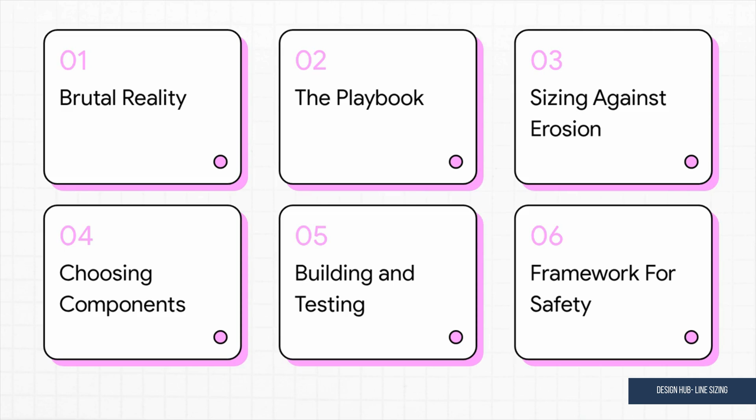So, here's the game plan. First, we're going to paint a picture of just how brutal the offshore world is. Then, we'll introduce the playbook itself. After that, we'll dive into 3 key principles: how you size pipes to fight erosion, how you pick the right parts, and how you test everything to make sure it's absolutely safe. And finally, we'll pull back and look at the big picture.

All right, so first things first, we need to set the scene. Why is a standard like this so incredibly necessary? Well, it's because an offshore platform has to survive in one of the most hostile environments you could possibly imagine. We're talking about insane pressures, sometimes up to 10,000 pounds per square inch. You've got this huge swing in temperatures, but the real relentless enemy is the chemical attack.

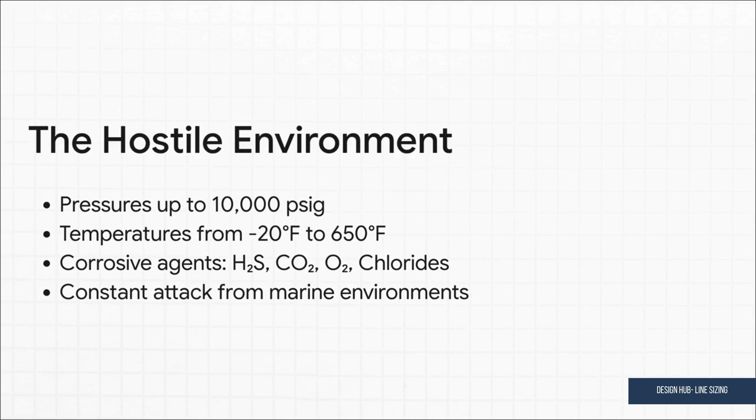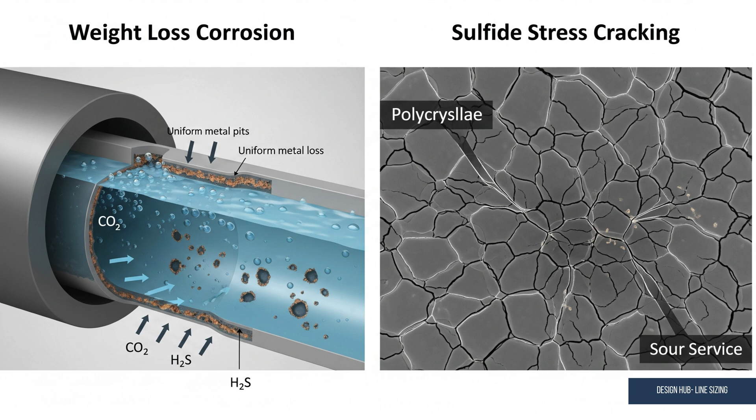You've got saltwater, corrosive gases like hydrogen sulfide, CO2, and chlorides just trying to eat away at the steel 24/7. In a world like this, the consequence of failure is enormous. There is zero room for error. Okay, so how in the world does the industry fight back against all those forces? Well, they use a playbook.

So let's meet our guide, API RP 14E. Now, this is not some textbook theory cooked up in a lab. The document itself calls it a collection of proven sound engineering and operating practices. You have to understand, every single recommendation in here is basically written with the ink of experience, often tough experience. It's all designed to make sure that what gets built out there is both safe and reliable.

Okay, so let's get into the nitty-gritty. One of the biggest battles an engineer has to fight isn't from the salty air on the outside, but from the fluid rushing through the inside of the pipe. And that brings us to this concept of erosional velocity. Basically, if the mix of oil, gas, and water flows too fast, it acts like liquid sandpaper. It literally scours away the pipe wall from the inside out, which is, as you can imagine, incredibly dangerous.

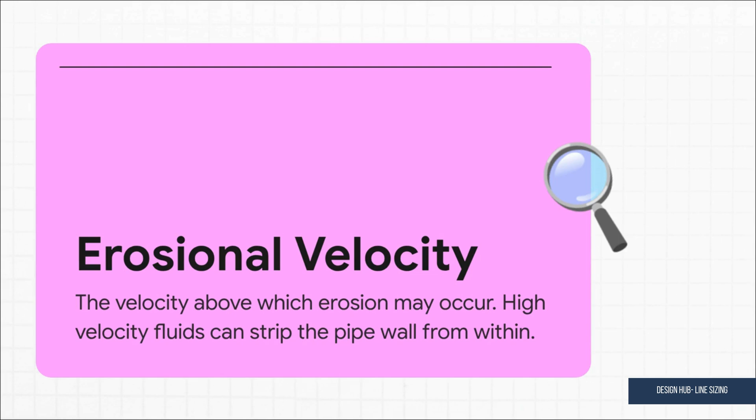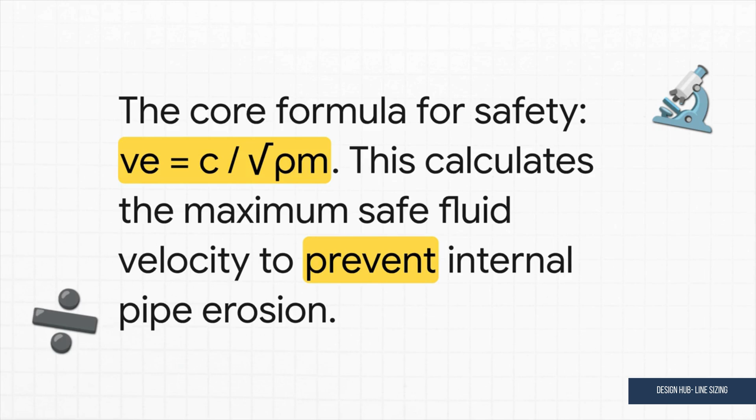So the big question is, how do you know what too fast actually is? Well, you calculate it. This surprisingly simple formula is right at the heart of the standard. It lets engineers figure out Ve, that's the maximum safe velocity, based on the density of the fluid, rho m, and this really interesting constant, C.

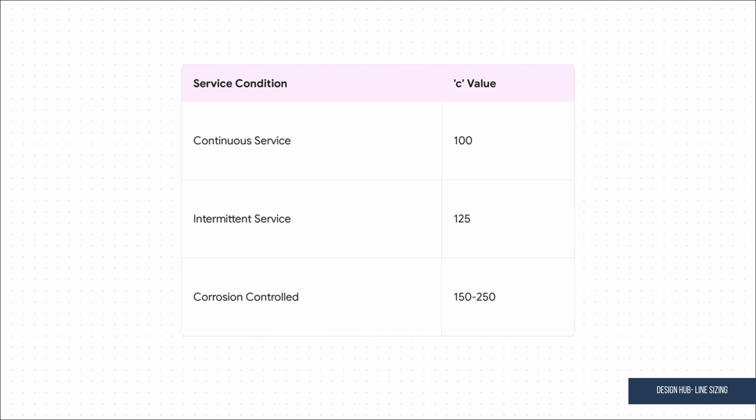And this right here is where you see the real-world genius of the standard. That C value, it's not some fixed law of physics. It's a number based on experience and judgment. You can see it changes depending on the situation. For a clean fluid that's always flowing, you use a conservative value of 100. If the flow is intermittent, or if you have really good corrosion control, you can use a higher number. It's the perfect blend of hard physics and field-tested wisdom.

All right, so you've sized your pipes correctly. What's next? Well, you've got to put stuff in those pipes. And just like with velocity, making the right choice is absolutely everything. Because out here, a valve is never just a valve. Every single component, from a tiny little fitting to a massive valve, is a carefully engineered decision. You have to think about what it's doing, the pressure it's under, the temperatures it has to handle, and what kind of fluid is passing through it. One single wrong choice can put the whole system at risk.

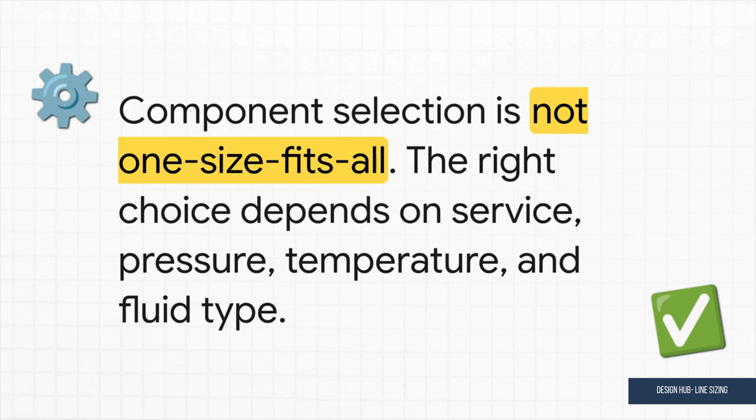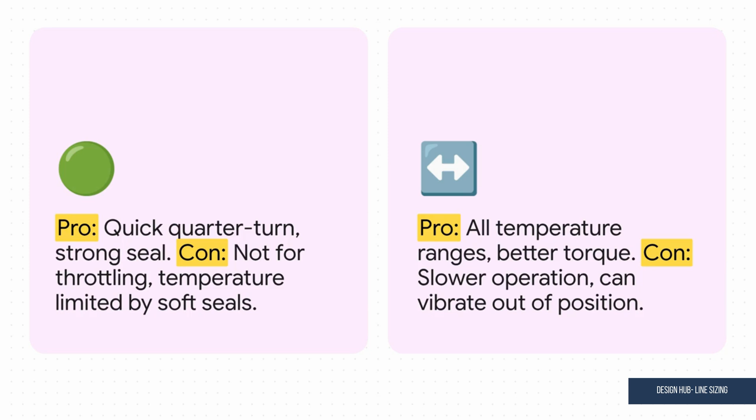So let's put 2 common valves head to head to see what I mean. Need a quick, tight shutoff? The ball valve is your friend. But those soft seals mean it can't handle extreme temperatures, and you really can't use it to just partially throttle the flow. For a high-temp, heavy-duty job, you might pick a gate valve. But the trade-off? It's much slower to operate, and it can sometimes vibrate. The standard is full of these kinds of critical trade-offs, guiding engineers to make the smartest choice for each specific job.

So the design is done, the parts are all picked out. Now for the moment of truth, actually building the thing and, more importantly, proving that it's safe. Before a single drop of oil or gas flows through those pipes, the whole system goes through an intense pressure test. And I'm not talking about a quick check. This is a super methodical process.

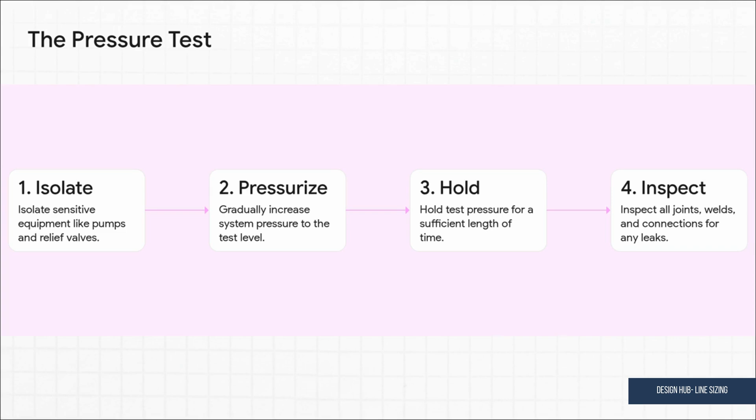You isolate anything sensitive, crank up the pressure way beyond what it'll ever see in normal operation, and then you hold it there. You hold it so inspectors can meticulously go over every single joint, every weld, and every connection, looking for the tiniest microscopic flaw. It is the ultimate final exam for the system.

And when you get to the most critical, highest pressure systems, the places where a failure is just not an option, the standard is completely and utterly uncompromising. It demands 100% radiographic inspection of the welds. That means every single inch is basically X-rayed to prove it is absolutely perfect. No exceptions, no excuses. Okay, let's zoom out for a second.

We've talked about erosional velocity, choosing the right valves, X-raying every weld. What's the big idea here? What does all this incredible detail really add up to? What it adds up to is a complete framework for safety. This document, API RP 14E, it's so much more than a book of rules. It's the collected wisdom, the institutional memory that allows a massive global industry to operate safely in one of the toughest places on Earth. It's the bedrock of reliability.

But I want to leave you with this because it's probably the most important part of the entire document. Right there in its policy statement, it says it's meant to supplement, not replace, individual engineering judgment. And that's the final crucial takeaway. No matter how good the playbook is, no matter how detailed the rules are, at the end of the day, it all comes down to the skill, the experience, and the judgment of the engineer on the ground to keep everyone safe.